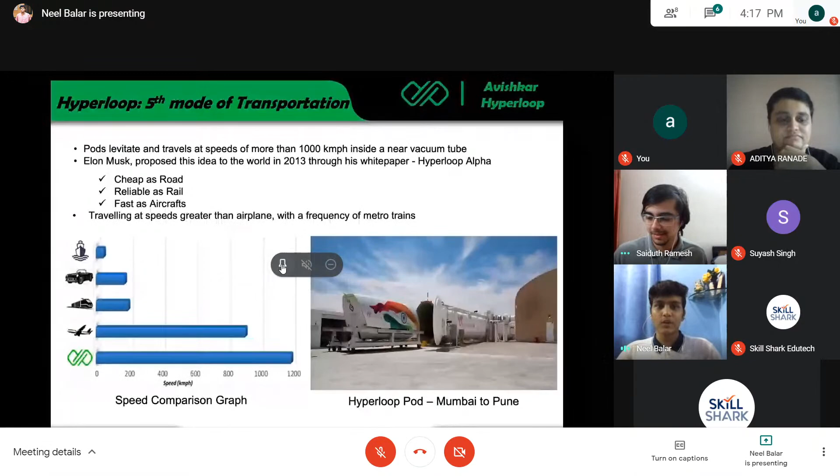Sure, Neel, can you take this? Yeah, so Hyperloop is basically a fifth mode of transportation. It's called the fifth mode because the current four modes are railways, waterways, airways, and roadways. Hyperloop travels in a near vacuum tube, where the pressure is very low, around 1/1000th of atmospheric pressure. That's why it's called the fifth mode of transportation.

Here we can achieve very high speeds because of two main reasons. As we'll be traveling in a vacuum, there'll be no air drag, and apart from that, the concept is that the pods are going to levitate, so there will be no friction either. So we are basically eliminating both sources of resistance to travel, and that's why it can achieve such high speeds.

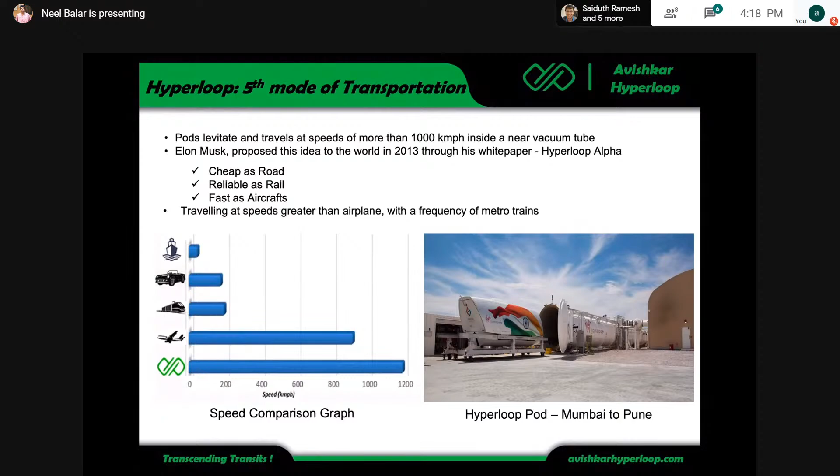As far as feasibility is concerned, Hyperloop is as cheap as roadways, bus, or train, and as fast as aircraft, maybe more, depending on the distance between the two cities. Here we have a small comparison of cost and time for the Chennai to Bangalore route. You can see the cost is somewhere between the train and the flight, and the estimated travel time is much less than even the flight, because with flights there's extra time since you have to check in beforehand, but nothing like that is required here.

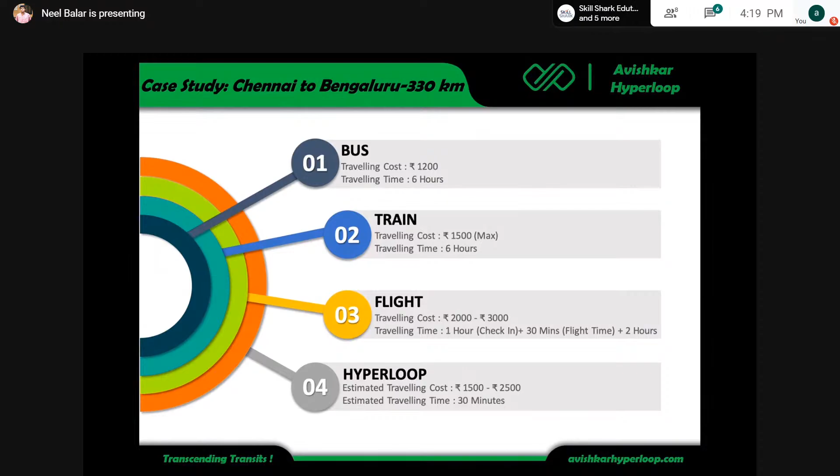The stability or suspension subsystem takes care of vertical and horizontal suspension, because when traveling at such high speeds, we need something to keep it from vibrating more than a certain level. Then we have the power subsystem, which takes care of powering all the different parts of the pod. And then we have the control subsystem, which takes care of all the controlling, like giving the signal to propel the pod, brake the pod, or increase the speed — everything is controlled by the controls board.

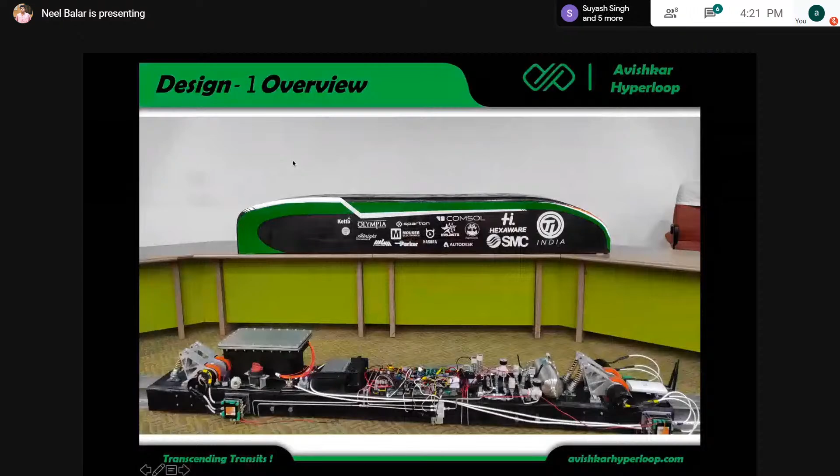So this was for our second design. Our first design was around, you can see the length of it, it was around 2.7 meters. For the second iteration, we tried to reduce it by a huge amount, so our second iteration's length was around 70 centimeters, and basically you can put the whole pod in a large suitcase. So again, here we had different subsystems, and in our second iteration we tried to optimize all our subsystems and reduce the weight and size of the pod.

Yeah, that's about it. It's really interesting to see the design and build of your vehicle, especially the propulsion system. Like you said, you can either use the electromagnetic propulsion that you were talking about, and I also read online that some teams use pure pneumatic propulsion as well. What are the advantages of both? I would guess perhaps the major disadvantage with an electromagnetic system is the weight of the assembly itself, right?

Not necessarily, because what we did here is basically we have motors and wheels mounted to those. Initially we had motors which were very big, but as we were propelling, because of the repulsion in the magnetic fields, we didn't have to use such high power motors. So we chose very small motors which you can use even in drones, and because of that we reduced the weight here. As far as pneumatic propulsion is concerned, I think that will weigh higher than this, because we need to store the gas in a big pipe and big cylinder. So the main problem with that pneumatic subsystem is that it increases the size by a huge amount, like it requires a lot of space.

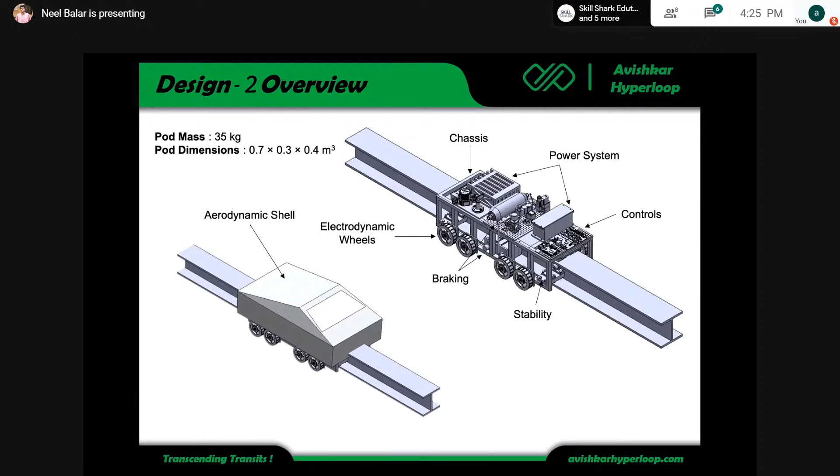Right, so the competition actually doesn't worry about the G forces, since there's no human sitting on the pod at the end of the day. So it's all about propelling it to the highest speed in the lowest amount of time, and that's the criteria to win at the end of the day.

But before that, we have 7 days of testing week, a complete week where we have to demonstrate each subsystem individually. For example, power systems - we have to demonstrate how safe we are, what level of charging and discharging our batteries are doing, and how they're behaving in backup.

What kind of monitoring can we do on top of our batteries? Similarly, are we able to put brakes? Are our control systems working on time, and are several other sensors working fine or not? All these things have to be undertaken while we are testing in Los Angeles that week.

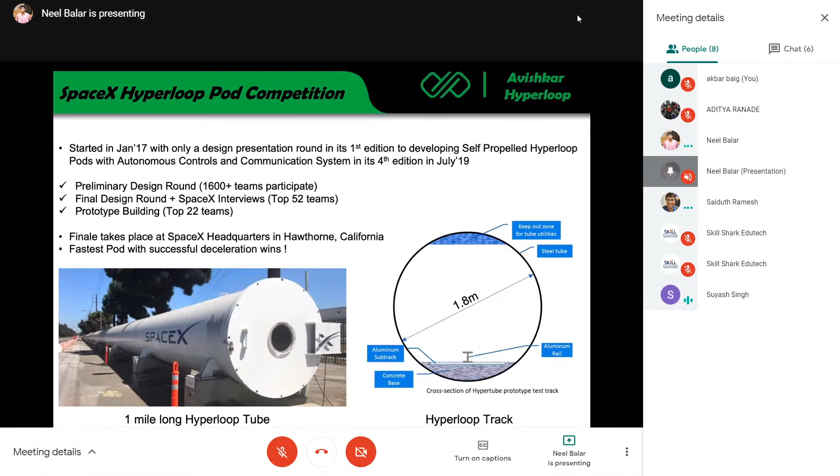That is where, because it was the first time for us - all other teams in the top 10 besides us were returning teams - one of the components failed. It wasn't actually failing, but SpaceX has such high standards they wanted a data sheet for everything. We didn't have that data sheet because we went to the local market, bought the component, and put it into the pod. That is where we lost one complete day, and that is why we couldn't take it to the finals, we think.

So there's a whole lot of criteria. They have a very, very big rule book which we have to go through page by page - I think 14 to 20 sections. Some are applicable to some teams, like pneumatic propulsion, while some teams demonstrate levitation. So a few sections don't apply to some teams, and they apply to others. That's how it happens.

But there are 14 mandatory sections, as far as I remember, and they have subpoints. So in total we have to go through another 110 tests before we make it to the final queue.

Interesting, so you have to first clear a certain number of gateways before even being allowed to go international and go to Los Angeles, right? Yeah, right, yes - I'm only talking about once you reach Los Angeles. Before that, reaching there, it's a whole other process.

Coming to that, I heard there were almost 1500 to 1600 different entrants in terms of concepts when the first competition came out. What sort of procedures did you have to go through to be one of the only teams from India to represent your design? What was that process like?

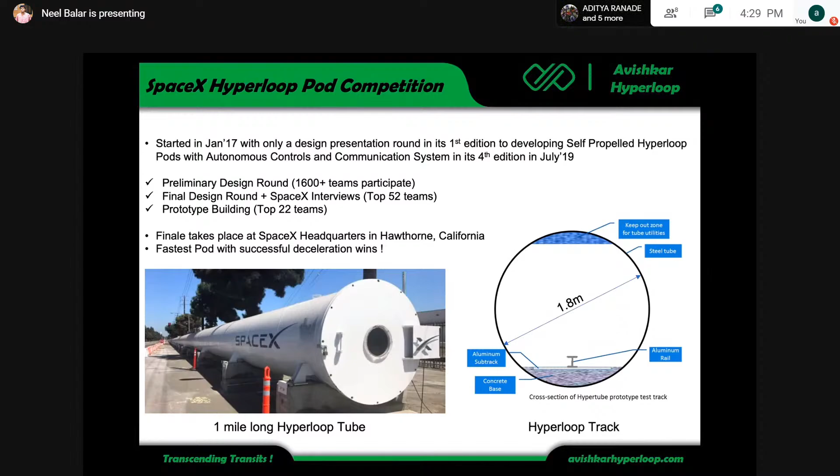We don't know what the 1500 concepts were because that's completely with SpaceX. But what we did in our first attempt is we had this really futuristic Hyperloop concept that we presented to SpaceX. There were some issues with that - this is the successful design we were showing in the presentation, but before that there was one more design, design zero I would say, which was not successful in our first attempt.

But a couple of us, like me and Aditya, managed to go to the US and find out what other teams were doing, in 2018 summer. We came back with complete know-how of the competition because other teams participating from India or abroad were posting enough on social media that you could get to know what exactly was happening. That's another motto of Avishkar - to make people aware without actually paying for a flight ticket and going to the competition to see it.

So we did that, came back, and saw that there are 3 rounds to it. First is the preliminary design round, second is the final design round, and third is testing, and then finally you get to run the pod.

So the first round was okay, because it's more about presenting your own concept - they see the level of detailing that you do. So we ensured we were designing down to the nuts and bolts. We weren't just putting it in the air saying this is how it will integrate - we were actually specifying there'll be M2 bolts, M8 bolts. That level of designing we did in the first round itself.

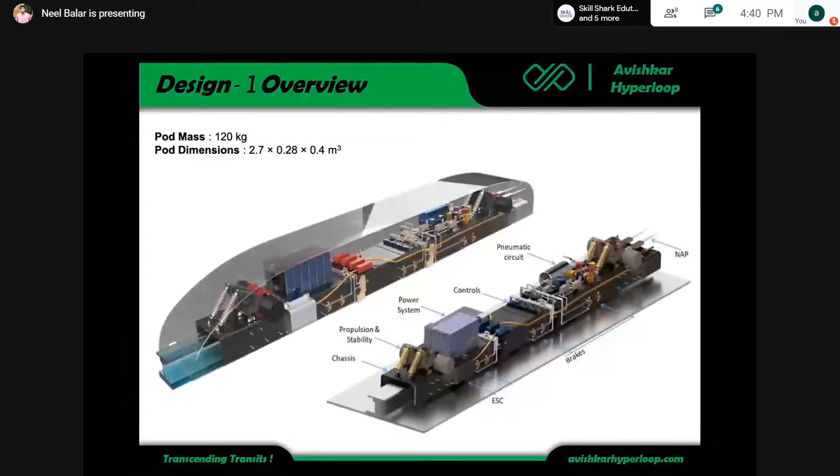So, sponsorship. Initially, our institute helped us. As Aditya mentioned earlier, we work at a student organization called Center for Innovation, where all other student teams also work. They have some budget and allot it to each student team. We got some budget from there, and then we also approached our alumni and many industries for sponsorship. We got a lot of support from our alumni, and even our advisors helped us a lot in getting sponsorship, because the total budget required was around 1 crore.

So we required a lot of help, and our alumni supported us. As I mentioned earlier, even our institute supported us initially, since we didn't have anything to test upon or start with. That's when our institute gave some money to get components and start testing. Then slowly we started approaching industries and pitched them based on the design. Not just cash sponsorship, we also got kind sponsorship from companies like Comsol - they gave us money as well as the software we used for simulations. Other companies like Melasta - we used Melasta cells for our power system subsystem. Some sponsors gave us kind sponsorship, like a profit margin on components we bought, around 50% or 80%. That's how we got the money and kind sponsorship to build this prototype.

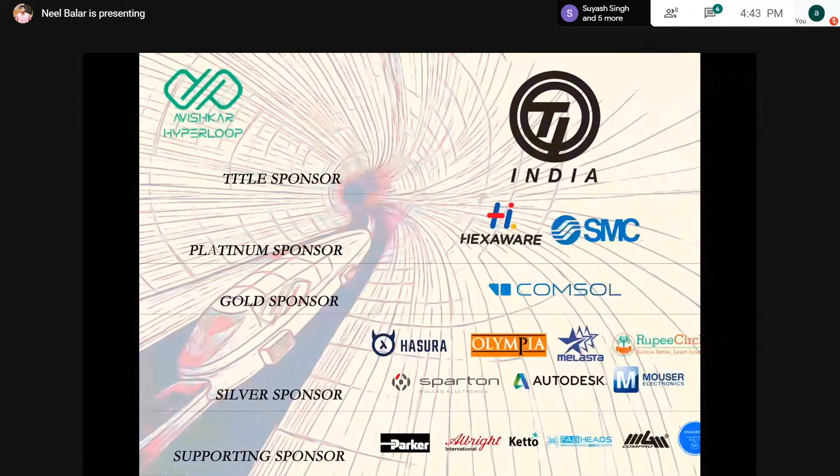I may add, Neel is being a lot lenient actually - he didn't tell you the challenges. What happened was we only had 3 months, and we had to procure a lot of components from abroad, and also raise 1 crore. So raising 1 crore plus having 50 to 80% of the components coming from abroad was something we had to manage, and that was really the toughest point we were in. With the help of all our team members, excellent coordination, plus a bunch of great advisors, we were able to raise the funds and simultaneously put orders - one shipment coming from Czech Republic, one from China, one from the US. That's how we managed it. So Neel is being really lenient, but it was not that easy as it looks.

Absolutely, I've got to say, great job putting all that stuff together. Even at such a small scale, you see how much it's actually amounting to. That really brings the question of how much, and it puts things into perspective as to how much it would cost to scale this up. Which is why we've reached the penultimate question, and we'll need to get through this a little fast, but it's a detailed question - I hope we can fit this all in.

When you look at the scalability, your vehicle is a prototype and a benchmark for a potential full scale test in India. What would be the technical differences between your prototype and the real model, excluding the obvious differences of size and power requirement? We've seen Hyperloop One by Virgin - it started off as a concept and they're working on that, and India was one of the case studies. We also saw that a Mumbai-Chennai corridor and potentially a Bangalore-Chennai corridor were some of the case studies, and a bit of work going on especially between the Mumbai-Pune corridor. How much do you think you will be able to contribute to that? Is your team actively involved in this, having some real time involvement in this long term project?

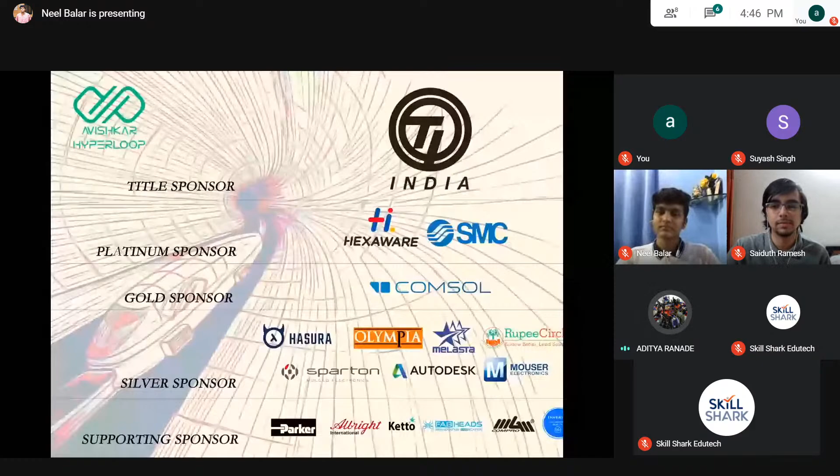But when it comes to a full scale project, it won't be that easy because Avishkar Hyperloop is a student-run team and falls under the purview of IIT Madras. So if Virgin Hyperloop One plans on doing the Bombay to Pune corridor, it has to be with the Maharashtra government, so there could be a lot of hurdles. But I won't rule out the possibility of Virgin Hyperloop One collaborating with some Indian company or venture to do this.

Second point, coming to the differences between the small scale prototype which we made and a large scale model of a Hyperloop. Obviously the size is one of the biggest issues, and as you said, the power is also an issue. But apart from that, one of the major issues is the propulsion mechanism we are trying to use.

As you saw in the prototype, we use a brushless DC motor. We had four wheels powered by four motors, and we were just pushing it. It's not that easy at a large scale, because the contact friction between the wheels and the track becomes significantly higher than at the prototype stage. The pod you're seeing on screen weighs about 120 kg, but a full scale pod will weigh around 10-15 tons.

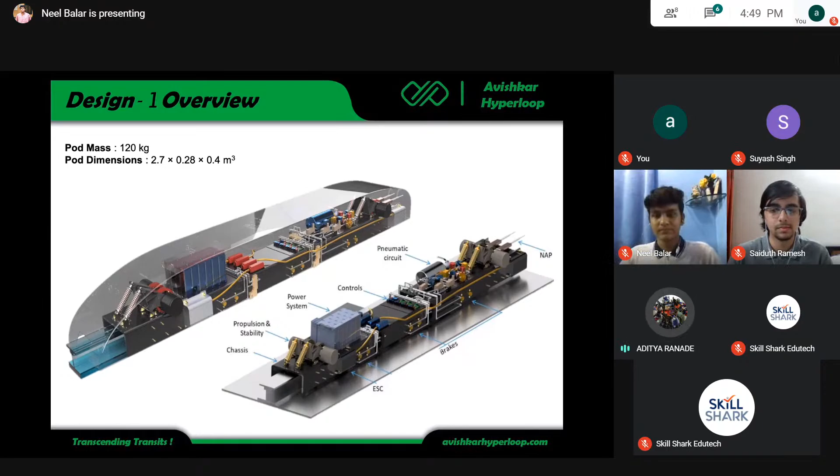The second one is magnetic levitation, or the electrodynamic fields. As Neel pointed out before, in the pod we made this year, we had implemented electrodynamic wheels. That's also a non-contact mode of propulsion, but it's slightly more advanced than the linear induction motor because apart from generating thrust in the forward direction, it also generates a slightly lower lift force, so it's able to levitate the pod as well as propel it. It's not yet completely developed - the work is still continuing, and we still need to develop a lot of it. But this will be one of the major differentiating factors between a prototype and a full-scale model.

Another thing is vacuum compatibility. When you're talking about airplanes, they travel at 35,000 to 40,000 feet, and it's not a complete vacuum outside - there's still some air pressure. But with a Hyperloop, it'll be like 1/100th of normal air pressure, very low to be of any significance. So we need to make sure the pod is completely vacuumized and completely sealed, because even a crack or a single gap left between any two components will cause the air to escape.

Again, the acceleration has to be within the limits of what a human can endure - you can't give 4G of acceleration because it's not good for the human body. Likewise, the deceleration has to be within limits. Another issue will be the track - you can't have random curves or instantaneous bends in the track.

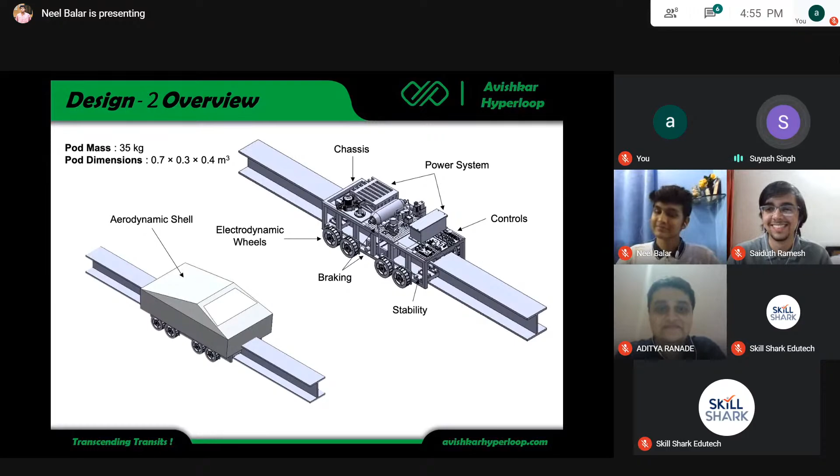Then the second was when we were wrapping up for the day, and Elon was meeting several teams. We got a chance, we were all cheering for him because everyone was cheering for him. He suddenly turned, and we started talking to each other. Again in a fun mode, we asked him, 'Why not Tesla in India? Why is it not coming to India?'

He gave some answers, and then suddenly told some more things about several other regulatory issues, or Asian issues. Asian governments have different ways of handling Tesla. So he started talking about tips and how he designs things, how he thinks. One more interaction I remember is him saying that if you're wasting too much time simulating things, then you're doing it wrong. That was the one message we heard.

That's a really, really big thing for me, to be very honest. That is the approach we actually took in Team Avishkar Hyperloop - we were always about experimenting, not simulating too much, no matter what kind of funds we had. Then we had a laugh and wrapped up. Quite inspirational for all of us - that was a dream come true for sure.

Go ahead, Neel. Basically, I was the youngest in our team when we went to Los Angeles to represent India. Initially when I joined, I didn't know anything technical, but after I joined, everyone from the team supported me a lot. They helped me a lot, and because of them I was able to learn a lot more stuff. And meeting Elon Musk was, of course, one of the dream come true moments.

After the competition, after the final day, after we went back to our hotel, all of us just sat in a room and were discussing how the journey had been since the past year - all of us working together so hard on it. Everyone was sharing their experiences, and that was one of the memories I would remember forever, because that's when all of us shared our views on how the past year had been after working together for so much time. So I would say that was the biggest memory for me.

From my end it's slightly different. As I said, I've been part of the team since the first year, and in the first year we didn't actually make it to the finals. Maybe people in the team felt demotivated, but no one showed it on their faces. We got the results in February that we weren't qualified for the final stage, and we had our midsems - our first quizzes and exams at the end of February. By the first week of March, we had already started working on the design for the next year.

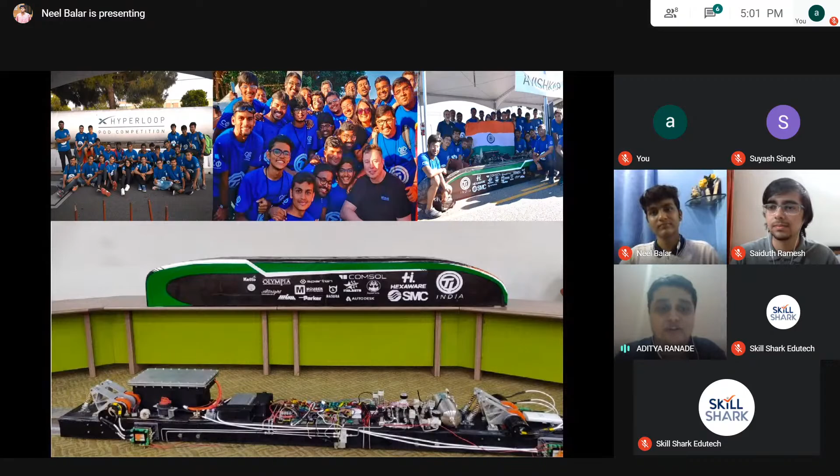So the major takeaway is that even though we hadn't qualified for the 2018 competition, it wasn't like people said this seems too difficult, we're not going to try again - no, that wasn't the case. In fact, the next year we had an even bigger team when we tried to qualify, and that time we successfully qualified. So that minor two-week gap between the email saying we weren't qualified and starting work for the next stage - that two-week gap was all we needed to bounce back and start working with new vigor.

The same thing happened at Los Angeles when we went to the competition at SpaceX. The competition ended on the 22nd, that was the final day. On the 23rd morning we were already discussing plans on how to finalize a new pod, even though we didn't know if SpaceX would hold the competition again or what the scenario would be a year down the line. After just one single day, everyone was back working on it completely. That small turnaround time is what gives a major advantage for the team, and it's a point that has been inculcated in all the team members so far.

To be very honest, every moment was a big moment and cherishable for me. Every team member was equally important, every moment was equally important for me. But the key thing that always comes to my mind is, despite all the challenges we had, let me try to draw a fine line between other competitions and this one. It's completely different, it's sky apart.

You can't really compare, because I even came from a Formula team, I have worked with that, so I have an idea of both worlds. But this is completely different, and the way our team reacted, all 25-28 members, some of whom weren't able to make it to Los Angeles that time, everyone equally put in their efforts, and I was really fortunate to lead them. They had so much patience to hear me when I was angry - Aditya is laughing - and maybe I never made them comfortable. Neel is one example, he used to get rugged, and all the time we used to send him here and there. But despite all this, we were together as a team, and that is what made us special.